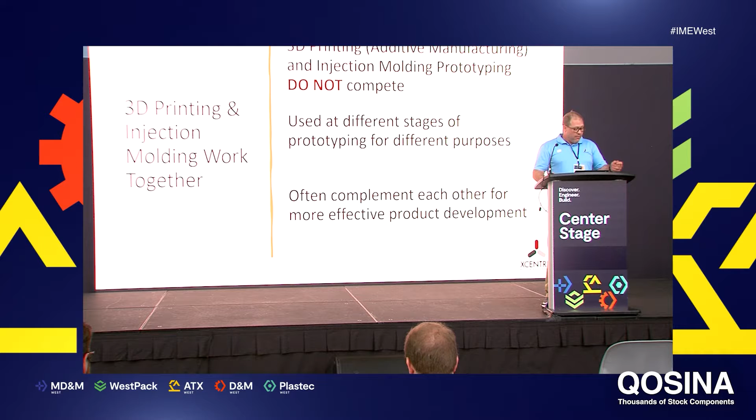So additive manufacturing, or 3D printing as it's oftentimes called, and injection molding are not competitive technologies. They both serve the prototyping element of your product development cycle very effectively and complement each other quite well. They're definitely used at different stages of the process though, so we're going to dig in a little bit more on that and take a look at how they complement each other really well.

So to start with, some of the advantages and disadvantages of each type of technology. So 3D printing, or additive manufacturing, is great for quick iterations. You can have a part built in as fast as a day, get it to you in 2 days, and you can do a lot of iterative design process to really iron out what you want your fit and form to look like for that specific part.

You have relatively low upfront costs. You don't have any capital equipment or assets that you have to purchase like you do with injection molding. There's not a tool there. You can basically just submit a CAD design, print it really quickly, get part in hand in a couple of days. So they're great for fit, form, and even some functional testing, but there are some limitations there that we'll talk about in a minute.

With additive manufacturing, it's great if you have very complex designs that don't really have a way to be manufactured using traditional technologies such as injection molding or CNC machining. So even for production environments, if you have really complex designs, there is an opportunity to be able to use 3D printing for that as well.

Some of the challenges with 3D printing is it's typically a lower fidelity manufacturing process than what you see with injection molding or CNC machining. There are a tremendous number of materials that are available now from a lot of different vendors, but there are still some limitations in terms of the materials that you're going to get and the functionality of those materials. They're not necessarily going to replicate specifically what you're going to see with a traditional thermoplastic like you would see with injection molding.

So high flexibility with different materials that you can use. Pretty much any thermoplastic can be injection molded. It's just a matter of making sure that you're working with a partner that has the capabilities to use that specific material that you're looking for. And aluminum tooling specifically is actually a great option for bridge tooling while you're working on production tools.

Production tools can take months to produce, especially if you're talking about hot runner systems and multi-cavity class 101 molds. Those can take forever to get off the ground. With an aluminum tool, you can get a tool cut, single cavity, in as fast as 5 days for most relatively simple designs. So it does allow you some efficiency to get product to market a little bit more quickly than what you see in a production environment.

There are obviously some cons using aluminum tools for prototyping. You do have the cost of making the tool, whereas with an additive manufactured part, you can print it, have the part in a day, a couple hundred dollars, but with a tool, obviously, it's going to be a little bit more expensive on the front end. So you do have to keep that in mind as you're going through the design process. And we're going to talk about how these two technologies can marry together to serve everything that you need in the product development cycle to make it as cost effective and as efficient as possible.

One of the things I do want to caution you about with injection molding specifically is that before you get to a place of making a tool, make sure that you're partnering with somebody that can actually provide you with design for manufacturability feedback on your design before you start cutting steel or aluminum. It's really important that you start early in the process, so you're having those conversations even before you're prototyping, just so you know exactly what to expect in a manufacturing environment.

So taking a closer look at 3D printing specifically, usually this is going to be used for evaluating the feasibility of the design that you're working on, looking at the appearance or the feel of the actual CAD data that you've been working on. So again, great for fit and form, some functional testing. It's not going to give you the actual end-use material that you're going to use in production. So typically, the material properties shouldn't be a high priority at this stage unless you have some very specific testing that you need to do, which is when you'd want to consider other technologies to produce the parts.

Typically, again, volumes are always a consideration with additive manufacturing. From a cost per unit perspective, the more parts that you need to build, there's usually a transition point where it makes a lot more sense to go with a traditional manufacturing technology such as injection molding versus doing prints, just because the average unit cost is going to be a lot higher.

There are a tremendous number of printers that are available, both commercial and industrial. As you guys walk around the show, I'm sure you've seen plenty of the printers that are out on the floor out here.

Relatively low-cost printers are available. There are some challenges that we'll talk about in a second with building the additive manufactured parts yourself that you have to keep in mind.

And then also another often used element for 3D printing that I mentioned earlier as well is that if you have a design that just can't be manufactured in any other way, or if you have custom manufactured parts that are individual on a case-by-case basis. So a good example would be like hearing aids.

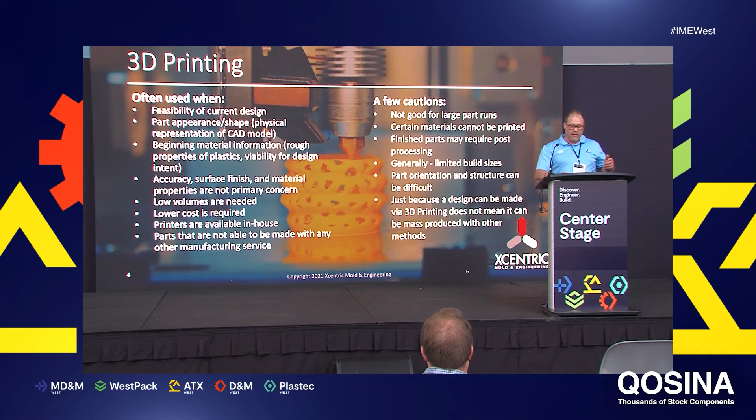I've seen marketing models that have been used for photo shoots that have been basically finished SLAs where they're highly painted, highly cosmetic. They're great for those types of applications. And there are a wide variety of different materials that are available that do simulate real world materials that we're using in a lot of injection molding applications. But again, it's simulating, it's not the actual material, so there are some considerations there. And as I mentioned earlier, it's also typically going to be a little bit slower than the FDM process.

So with injection molding specifically, often what we're doing with this technology is we're going to be using this for more complex parts. There's a lot of opportunity here for insert molding and overmolding, which there are some technologies you can use for 3D printing to simulate those, but it doesn't give you the same real world applications that you get when you're actually molding these features in or doing a true second shot molding process.

If your parts need high dimensional accuracy, or if you have specific testing that you need to do on the material, or drop testing or anything like that, typically you're going to look at using an aluminum tool to do prototypes out of the end material that you're going to be using, because that's really the only way that you're going to actually get an end-use part to be able to do those tests. Or if you're just doing some evaluation of what the part's going to look like, you want to look at shrink and warp and splay or aesthetics, like what the part's going to look like when it comes out of the mold. You obviously have to go with a process that's going to be very similar to what you're going to be using in a production environment.

Or if you know that you have to run a large number of samples of the part for whatever application. So if you need 500 parts, typically making an aluminum tool for your prototype is going to be a lot less expensive than printing 500 parts, even if you don't need to do any of the testing that we talked about before. But with that, there are some cautions that you need to keep in mind.

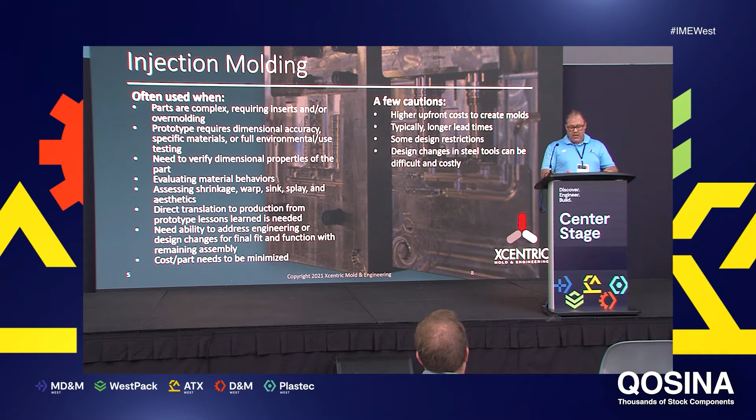So what we see is that most customers are using a combination of both of these technologies together. The way that we're defining success for them is we're looking at total design process time, design process certainty, and time to market, which are all very important parts of the product development cycle. So oftentimes what we see customers using FDM for, again, very quick, you can iterate quickly, you can even buy a printer where you can do it at your desktop in a matter of a couple of hours. So it's great for your initial concept, maybe the look and feel of the design, maybe even some functional testing, depending on the features that you have built into the design as well.

If you want more of a higher fidelity part, better surface finish, better finishing options, SLA tends to be a little bit better than what we see with FDM. And also with SLA, you have a much, much wider range of different materials that are available. The difference being that FDM is using an actual thermoplastic, whereas with stereolithography, it's a simulated material to that thermoplastic that you're looking for.

What we specialize in at Xcentric is prototype and low volume injection molds. Typically we're using QC10 aluminum, we can do P20 steel as well, but usually this is great for when we have customers coming to us for the prototype element of the process. Usually this is for fit, form, functional testing, where they have to use the end product material in their testing environment. So this is a great opportunity. We can do it relatively quickly for them.

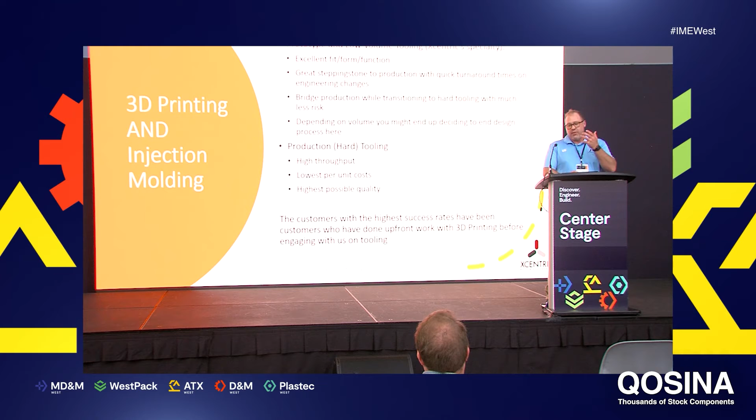And we often work with customers at Xcentric where we are, again, bridging the technology to help support them while they're working on those specific tools that take months to produce, using a prototype or low volume aluminum tool. Now taking a look at a couple of instances where we've worked with customers to use both of these technologies to help them accelerate their product development cycle.

So the first one, a customer had an idea that he wanted to present to his marketing team and his board for approval. And then after he got approval, he wanted to do some testing. He was doing drop testing in this specific instance, so he needed the actual thermoplastic that he was going to be using in production. And eventually it was going to be about a 50,000 shot per year program.

So what we did for him specifically is we used an SLA to get that in front of his board and his marketing team, so that could be socialized and approved before we transitioned to a single cavity aluminum injection mold. Because he needed to do the drop testing, we had to use the mold for the samples. We gave him 25 samples of the part, and then after that got approved and passed all the testing, we were able to transition to his full production using that aluminum tool, and it was able to run for multiple years without any issues.

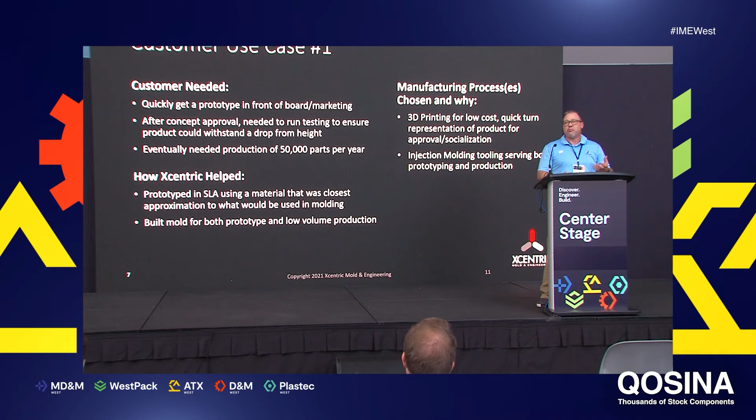So basically, why did we choose those technologies? Again, 3D printing, the SLA was a great opportunity to give a high fidelity, good surface finish part that he could get in front of his board. He could get the approval that he needed before we transitioned into injection molding to serve both the prototyping and the production that they needed for that program specifically.

The second case that I'm going to talk about is very similar, but there are some slight variances here. So again, he needed something to get in front of his marketing team and the board to get approval on the program itself, from the design and the concept that he had. And eventually they were going to be ramping to 10,000 parts per year. They knew that they were going to have a lot of design changes coming up through the process as well, because of the industry that they were in.

So what we did is we actually used the SLA for the socialization and the approval with his board and his marketing team. And then we created a prototype tool with the anticipation that we were going to have to make some changes to that tool.

So we made it steel safe around those features so that instead of having to remove plastic from the part, we were able to add plastic to the part to really get it dialed in to what they were looking for specifically. And so we were able to make very small, easy changes to the tool, relatively low cost, relatively fast timing, compared to having to build the tool from scratch.

So again, the 3D printing was a low-cost opportunity to be able to socialize the ideas and the concept with his board and his marketing team, and the tool allowed us to go through the iterations that we knew that we were going to have to go through with this customer.

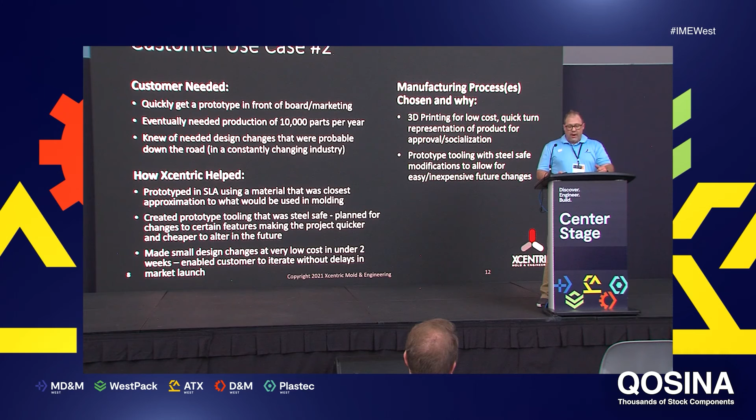And the last one I want to take a look at today is a customer that had already done their own prototyping in-house, and so they had already gotten the approval for the program. And their initial volumes were going to be really, really low. It was only going to be 50 parts for the first year, and that was going to ramp to about 25,000 parts per year after that.

The challenge that they had, because the volume is really low, additive manufacturing or casting may have been a really good option for that, but the environment that the parts were going to operate in was outside. It was going to be in a really rugged environment, so it needed to have a UV inhibitor added to it, and it needed to be out of an actual thermoplastic that was going to handle the rugged environment that they were in.

So what we ended up doing for this customer was, since they had already done the rapid prototyping themselves, we cut an aluminum tool so they could do the testing of the initial year 50 parts that they needed, and then they were able to maintain that tool after everything was validated to be able to transition to their full level of production with 25,000 parts a year.

So really, here, because of the material requirements, the only solution that was available for them was going to be injection molding, and we were able to do this in relatively short order to be able to accommodate all of their prototyping and production needs.

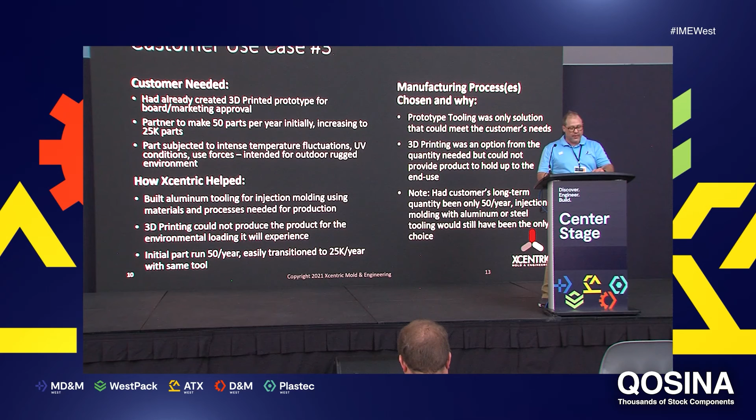So what are the decision criteria that we have for your project? There are a few things that you want to keep in mind here too. You want to consider your immediate, your mid-range, and your long-term goals for the project. So what are your budgets? What are your budgetary requirements for each of those different stages? How fast do you need to get parts in hand? What are you going to be using the parts for?

Is it going to be for demonstration? Is it going to be testing? Are there going to be expected or even potentially unexpected design changes that may come up in the process? What materials do you need to make the parts out of? And then what are your volumes going to look like for each of those different stages?

So I encourage you all to work with a manufacturing partner that can basically walk you through that entire process, provide the design for manufacturability advice that you need at the very front end of the process, and then support you through whether you're going to a full-blown production tool or not, be able to support you through each of the different stages, both immediate, mid-range, and long-term objectives that you have.